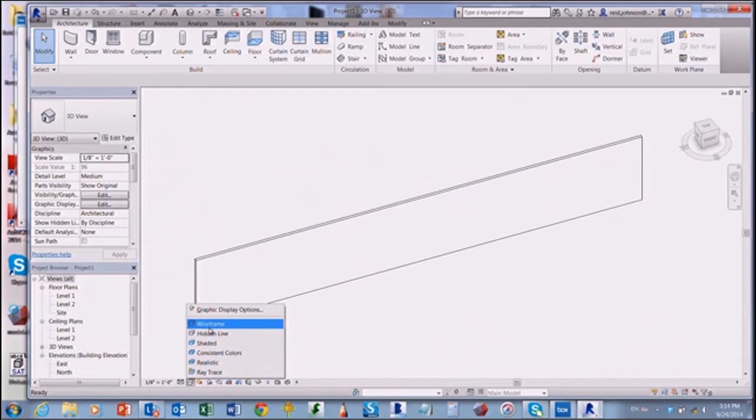Start off, and I'm going to go to the, after making that wall, I'll go to the 3D view and look at it. I like to turn on the shaded view down at the bottom left when I'm in 3D just to see a little more clearly what I'm looking at.

So basic wall. A lot of the trouble of making families students have is getting off the ground, literally, because everything in default, everything in Revit, the default is on the ground on one of the levels, so the horizontal planes. So it's important to get up and off of the ground in architecture.

So we're going to put some families on a wall. So we're going to go to the R, and we're going to hover over New, and pick Family. So R, New Family.

And we're going to do a generic family. I like generic families, they're a good place to start. You can do a lot with them. If you master the generic families, then you can pretty much do most of the others, except for the mechanical and electrical families - those take a little extra. So it's a good place to start.

We're going to do just a regular old generic model. So right here, generic model, and say open.

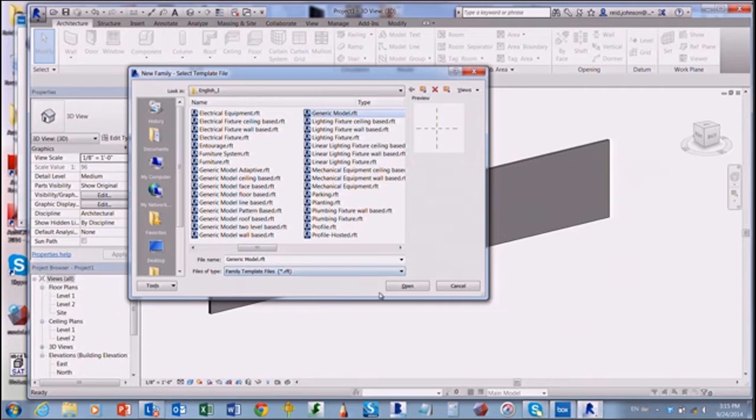So here I am, I'm looking down at the ground. You can see I'm at the reference level. So basically at the ground plane, I'm making a family, and I'm staring at the ground.

And all my tools to make families are up across the top. I've got extrusions and sweeps and revolves. Let's go ahead and make an extrusion, which is probably the easiest shape to make.

And you've got all the tools here, splines and lines and whatever type of shape you'd like. We'll just do lines for now, that's fine.

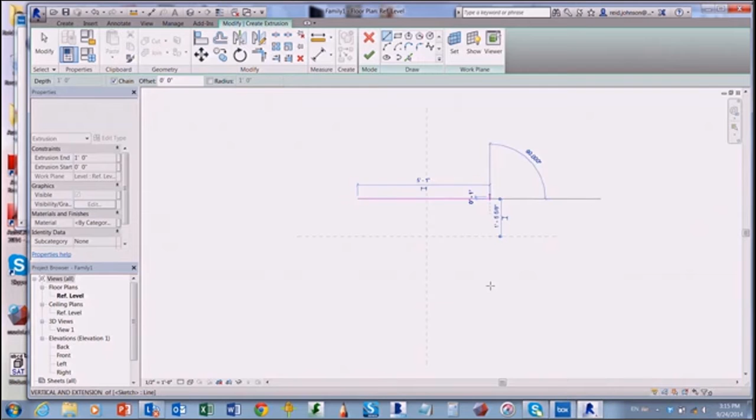So draw a basic shape, maybe a box with the corner bitten off of it. Trick is to make sure everything closes up nicely.

When you're done, hit finish. So there's my little shape I've made. Assume this is a wall panel I want to place in Revit.

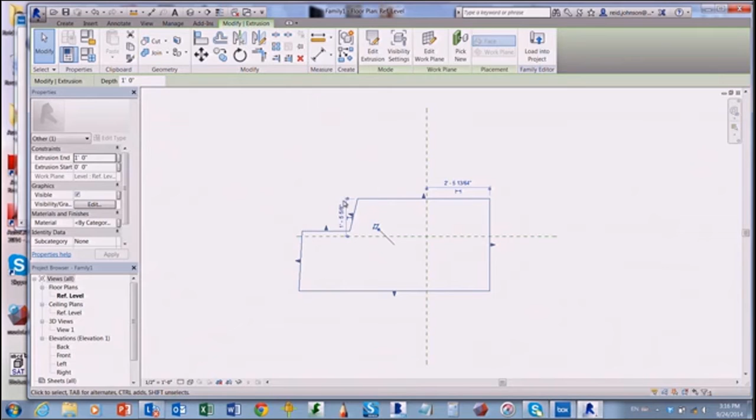Then I can come back, once I've created that shape, two things. Before I load this back into the project, I always want to save. So I go blue R, and I hit save.

Otherwise it's called Family 1. And I've looked at students' models, and I have Family 1, Family 2, Family 3, Family 4, Family 5. I'm like, no wonder you stay up all night in studio - you can't tell what anything is.

So be nice to your tired self and name everything so that later on you know what everything is. Just give that a name, we'll call it wall panel. So there it is, I've given it a name.

Now if I were to load this into the project, you can see it's on the reference level. So where's it going to put it in the Revit project? On the floor. But that's not where I want it necessarily, I want it up on the wall.

So if you go over here, to the top left, there's a little button with a yellow folder next to it. If you click on that, there's a couple little check boxes. It's always the little check boxes that get you - if you weren't sure why it's not doing what you want it to do, there's a little mischievous checkbox somewhere that's messing you up.

So the ones I want to check are two. The first one is work plane based. That means the default is at their reference level, their level or floor plan based. I want to make it work plane based - that means I can place it on any work plane, it doesn't have to be a floor. So that's pretty helpful to go vertical.

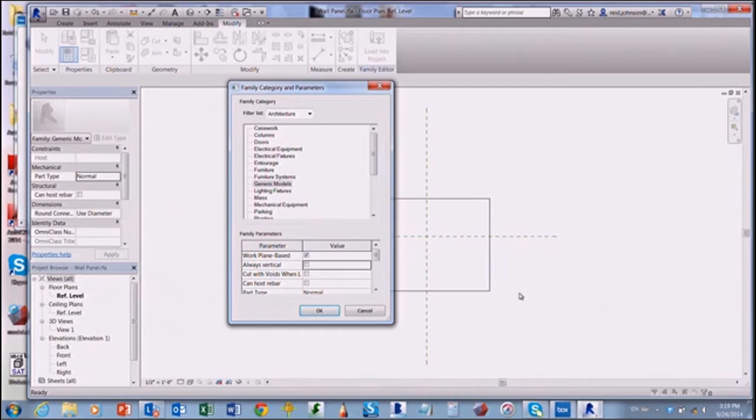The other one sometimes is cut with voids. If you want the family to be cut, like when there's a door there, that's an important one too. But for now, just check work plane based and uncheck always vertical.

And now we can load this into our project. By default, it's going to take us to a level 1 floor plan view. Go back to your 3D view.

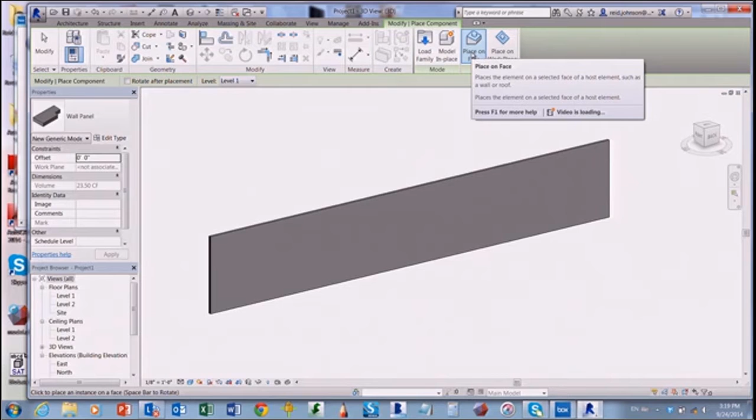And now you'll notice, assuming that place on face is checked, you can now place this family on the wall anywhere you want to, or on any other object. Basically, you're placing it on the face of another object. So those little checkboxes are little bugaboos - it's hard to know they're there, but once you know they're there, you can put this on anything. So I could place this on a wall, on a door, anywhere I want it on a vertical surface.

Is everybody able to do this? Anybody not able to do that? What's the difference? I've seen there's like a generic face-based family - is that essentially the same thing?

It's similar, we'll look at those in a second. I've basically taken a generic family and made it a face-based family by doing those checkboxes. So it's good to know they're there.

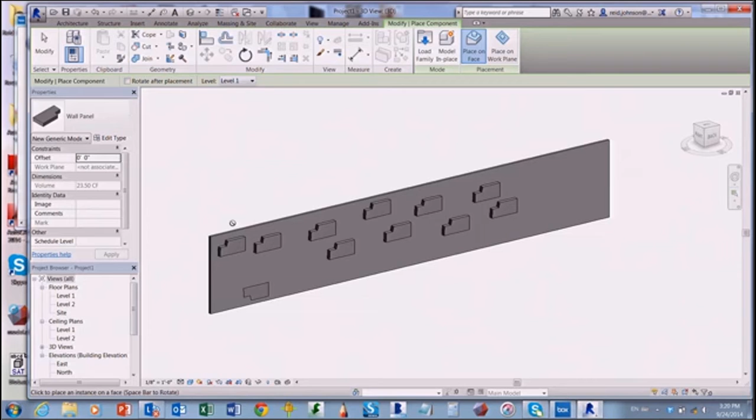And just as a trial, you can watch, or you can do this yourself if you'd like - you can make a wall. And if I do a curved wall, I can then place a component. It will also place that on a curved face as well.

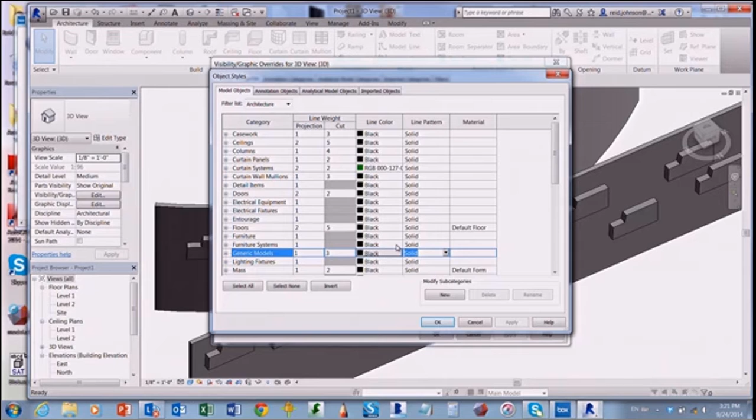This is kind of dark with that projector, so let me put some white outlines to make it a little bit easier to see.

So it'll find a tangential face to locate that. You can put it on flat objects, on curved objects. It can be really helpful for placing families. So it won't curve with the object, but it'll be tangent to the wall.

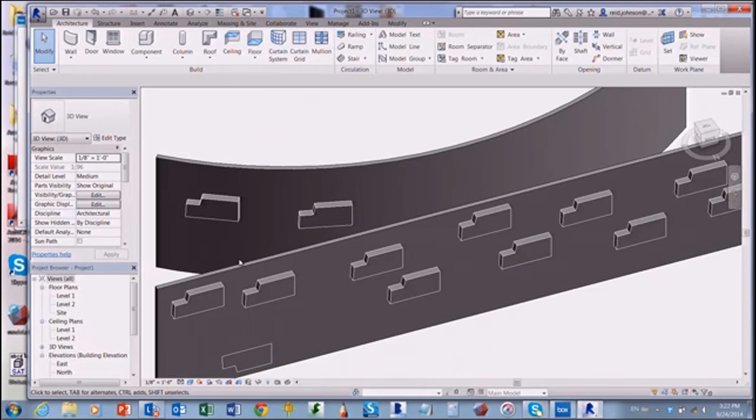A lot of these basic functions in Revit are designed that way on purpose. If you're doing a curved wall in reality, there are certain materials that can curve, like concrete or plaster. If you're doing almost anything else to build a curved wall, it's going to be built of a series of flat panels - that's why Revit does that, because it's kind of an architecture move to be built of a series of flat panels.

All right, so if we go back into this family, just two more quick things on this generic family. You can say edit family, or you can double click on it - takes you back. A couple of quick ways to add parameters, I'll show you my favorite ways. Let's go look back in the family - we can look at the front view of this.

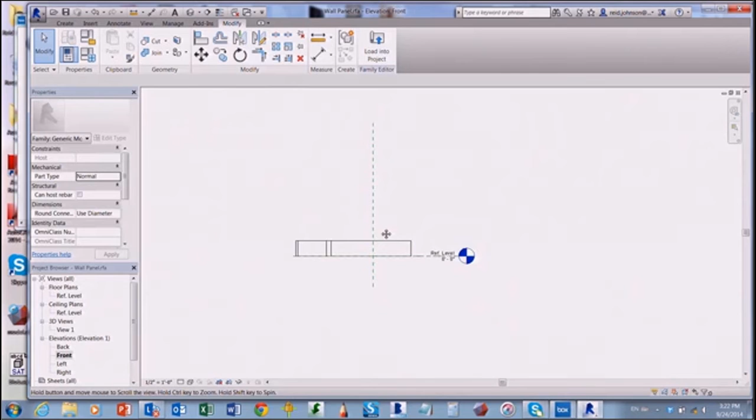It's good to add parameters, and the most common parameter we add is to change its dimensions, change its size - it may not want to be the same size all the time. So here in the family, I can come back and add a dimension, DI for dimension, or it's right here in the modify tab, add a dimension. So from the reference plane to the top of your family, your object, you can put a dimension here.

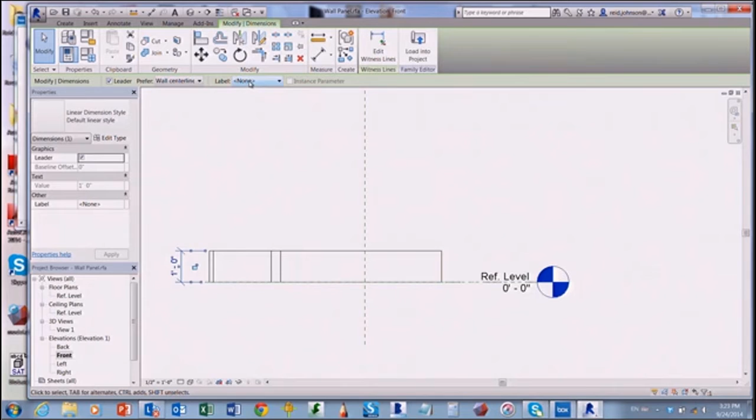Then I can select that dimension. And right here where it says label, I can add a parameter. So label, add parameter. And I can then give that dimension a parameter, which is really important. So I can call this simply the height.

H-E-I-G-H-T. And can anybody describe what the difference is between type and instance parameters? Type parameters will change the entire family. Instance parameter will change the individual one. Yeah, that's a good explanation.

So I like to give the example of a door. Doors in a project, you might have 3 or 4 different door widths, a 3-foot-0 door, a 2'8" door, a 4-foot door, and so on. But in the building, there'll be 30 3-foot doors, 4 4-foot doors, and 20 2'8" doors. That would be a type parameter. You want a bunch of the same type.

But if you want, heaven forbid, all the doors to be different, you want a 3'1" door, a 3'1 1/2" wide door, a 4'1" door, you're going to raise the cost on your project like crazy. Maybe there's a compelling reason to do that. That would be an instance parameter. If they all want to be unique, that would be an instance parameter.

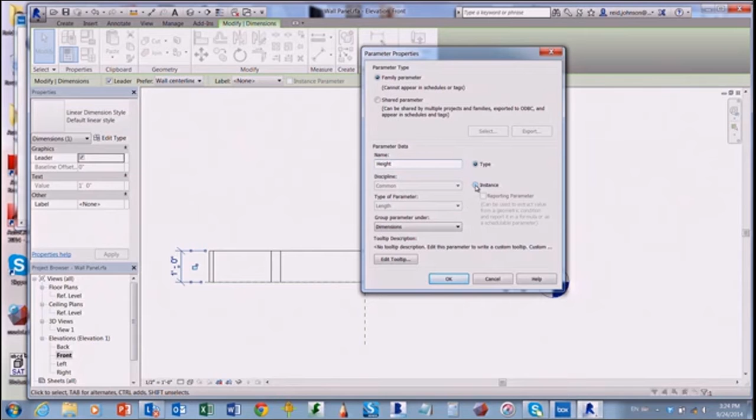So let's do an instance parameter for this one. Height, instance, and say OK. And now it's always important to test your parameters before you load it to the project to make sure it works. I do that in the upper left under family types.

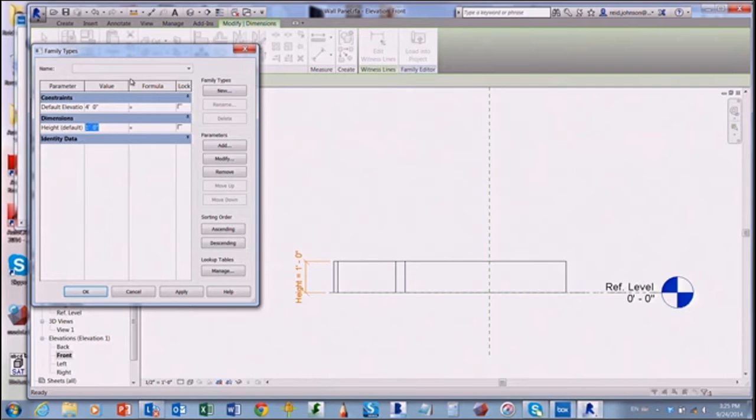There are 4 little blue squares. I click on that. And then from here, you can see that my dimension, my height dimension, is shown up as a parameter, and I can change that. I move this window - sometimes it wants to be right on top of the object, so I move it off to the side. And I can change that height and say apply.

And I can watch the thing grow or shrink depending on the dimensions I put in here. If there's a failure, which happens a lot when you're in testing mode, it will say sketch is over constrained or can't resolve constraints. And to debug that...

The trick I find is to dimension something else. So what about this could I dimension? Maybe I could put a reference plane at the top. So let me just demonstrate that. I could do a reference plane or a reference line. Let's do reference plane.

And instead of dimensioning the box, I could dimension the line. So let me delete this here. I'll do a dimension now to the reference plane. And I'll give that the height parameter.

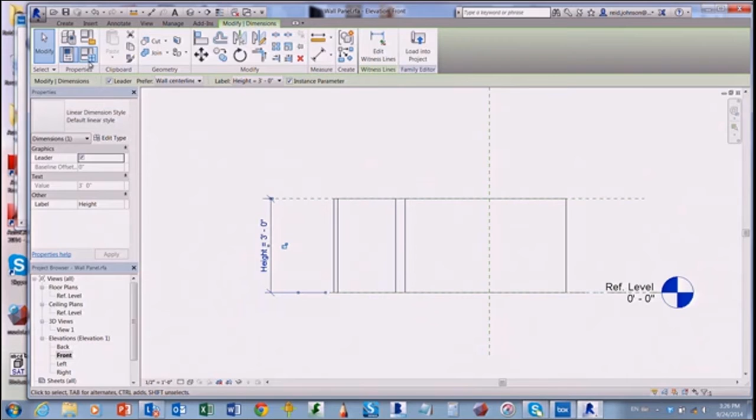And I can test this to make sure that's working. So I'll change that, make it taller, 4, and say apply. Now I can say I'm controlling the reference plane successfully, and that's working.

Now all I have to do is align, so AL for align, or it's up here, the align tool. I click the reference plane as a target, then I click the top of my box. It's going to shoot it up to there. There's a little lock that appears. I can lock that, and now they're stuck together like glue.

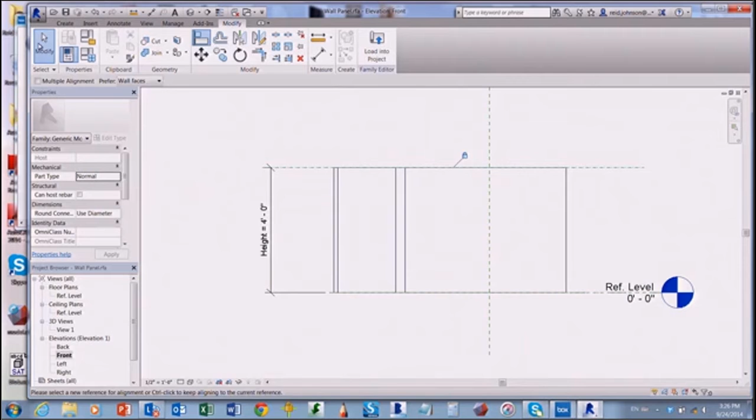So if I come in here, I can change my height, apply, and watch it grow and shrink. So that's the trick to debugging those. They come in, they don't work - try to dimension something else. Try to get it to work at the lowest form with these reference lines.

So if I create something called reference lines, see if you can get these green reference lines to move where you want them to first, and then align your shape to those green reference lines. So there's a couple of tricks. I know that those come in, they don't always do what you want them to do. That's a way of debugging.

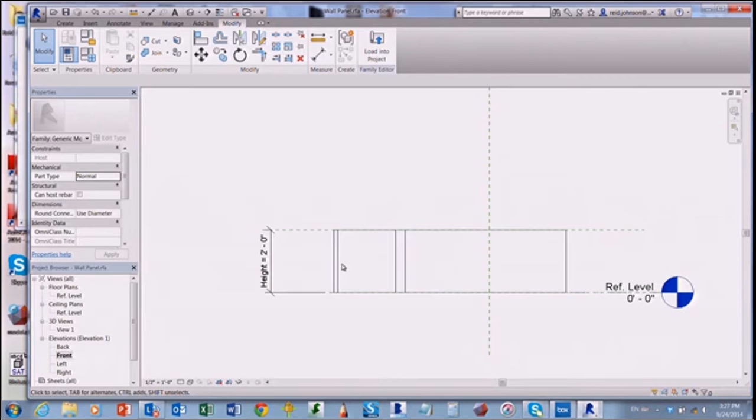So another parameter that's really critical in architecture is material. We always assign material to our building designs. So if I click on the object, you can see over here under materials and finishes, I have a material. Right now it says by category. There's a little button - it tells you you have no idea what that is, but that's a parameter button.

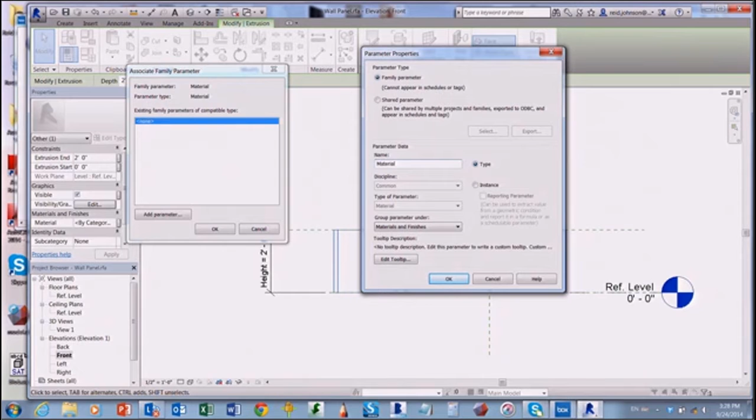So if I click on that, I can add a parameter. I can call this one material. I'll make it an instance parameter as well. And I'll say OK here and OK here. And now I'm good to go.

I've got two parameters, height and material. If I load this back into my project, I can say overwrite the existing version, and you can see they all change. Now I can click on these individually, and you can see I can adjust the material and the height of these individually. So I can change the materials, I can change the height of all of these individually.

That's a basic example, but knowing how to do that is super powerful. You can put in objects, you can change them, alter them, and a lot of things we do in architecture have multiples, so you can affect that across the whole project.

All right, so let's do one more generic family, maybe one or two more, and then we'll move on to another topic.

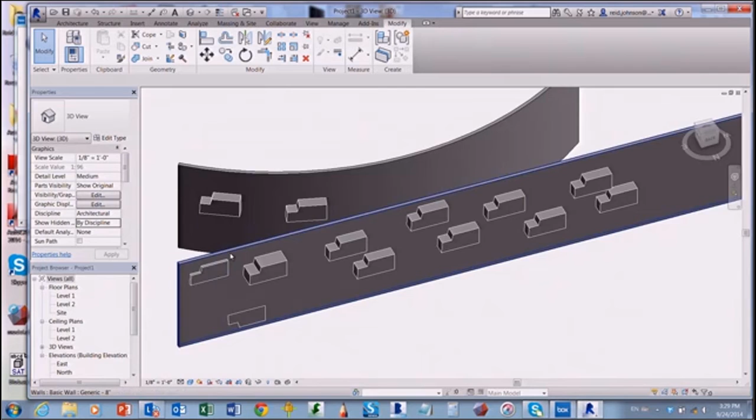So if you guys go to the purple R, and you get new family again, in generic model, you guys mentioned the face-based, so that's a family that's going to stick on faces automatically, so you guys know what that does now.

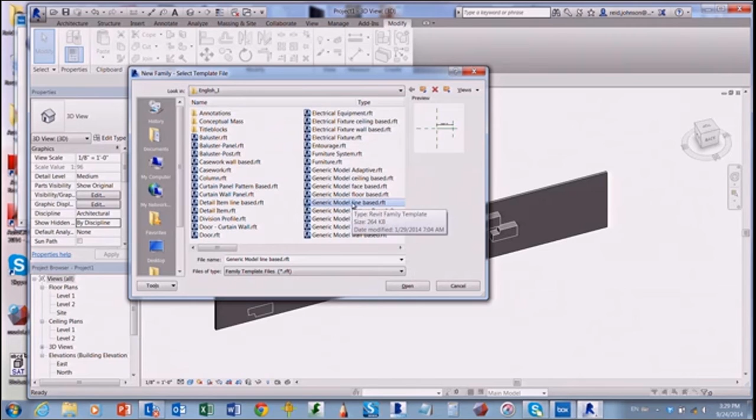We're going to do a line-based. So generic model line-based. And a little bit later we'll look at generic model pattern-based, which can be pretty cool. Just know that's one of the generic models. So generic model line-based, we'll say open on this.

So this is pretty cool. You can see there's a little line here. And there's a start working plane and an end working plane, and there's already a length parameter built in. So whatever I draw this line in Revit, it will drag across whatever shape I have from point A to point B.

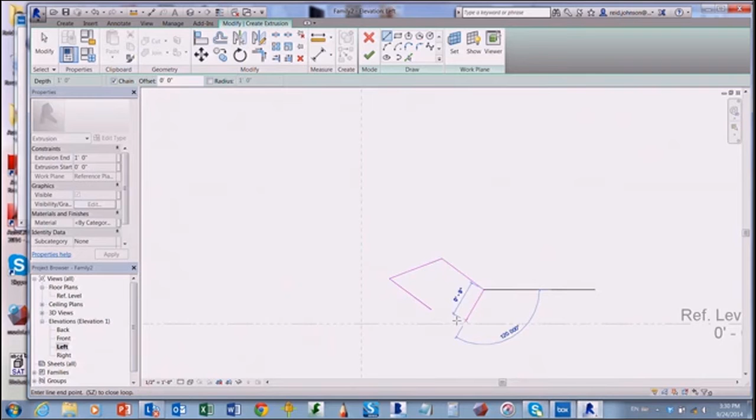So let's come to my left view over here, left view. And I can come again, do the simplest one, which is called an extrusion. Then I can draw some sort of shape. And finish that shape off.

And go back to my reference level. You can see my shape, it's right here. And if I click on it, there are little blue triangles. You can drag it so it's right in the middle.

Right now there's no association between this shape and the line-based family. So I have to use the alignment tool, which is up here, align.

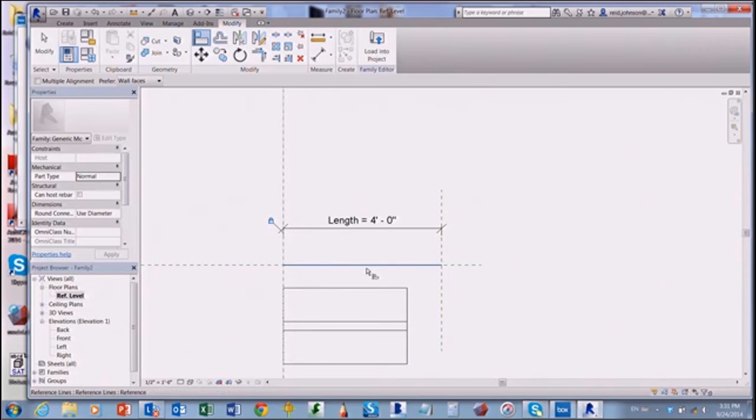I'll pick the back, the starting point reference plane, and then click the back of my object. A little blue lock appears, I lock that. Then I do the same thing for the front. I click the front reference plane, the front of that object, and I click the lock, and that locks it to the front. And now I can test it.

If I come back and change my family types, and I change the length to whatever I want to, say apply, I will watch that shape grow with that line.

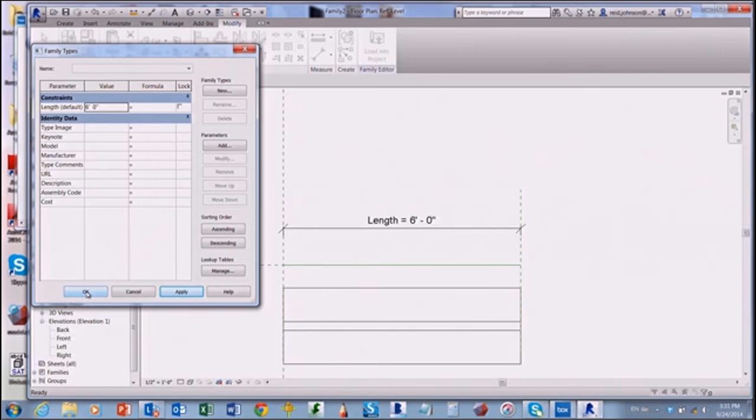So go ahead and say okay if that's working. Anybody need help getting that to work? You guys got it?

Okay, then we always save it. So blue R, save, give it a name. Calling mine line-based family. Then I hit save.

Now I load this into my project. And you can see I can load it into another family or to the project. Which one do I want to load it to? The project, most of the time.

You can also do nested families, which is families inside of families, so you can get pretty complex with your family editing. So if I have a door family, and I want the handle to be a separate family and have its own function, I can take a door handle and load it to the door family, and then load it to the project. So families can have multiple families inside of a family.

That's not confusing, all right. Yes? If you were to, in that instance, if we were to look at the handle to the door, would you save that sort of, the parameters of that family on the door, and then just load the door, and then the handle would be?

That's where it gets tricky. You have parameters for the handle, then you load it into the door, and you have to link the parameters. So it kind of packages them? Yeah, so when you finally load to the project, you can control the door parameters and the handle parameters in the project. Those get a little bit confusing, but you'll find when you're working as a professional, you just have to do those nested families sometimes. Especially doors and certain wall components and things, you'll find yourself using those.

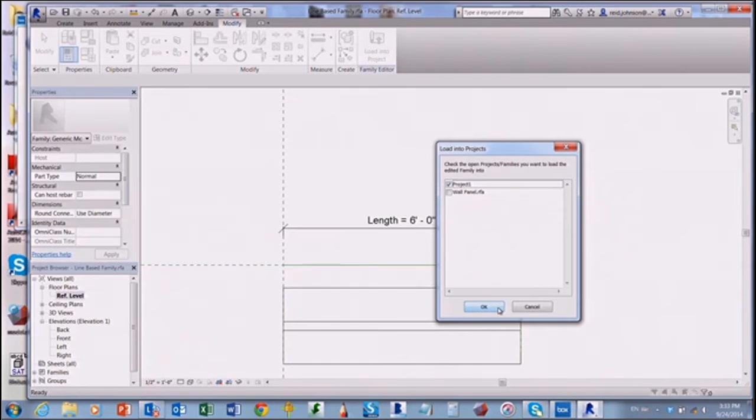So it's line-based, you can see Placed on Face is checked. If I go to my 3D view and hover over one of these walls, I can now draw a line on the wall to place that family. Every time I draw a line, I'm placing that family on a wall.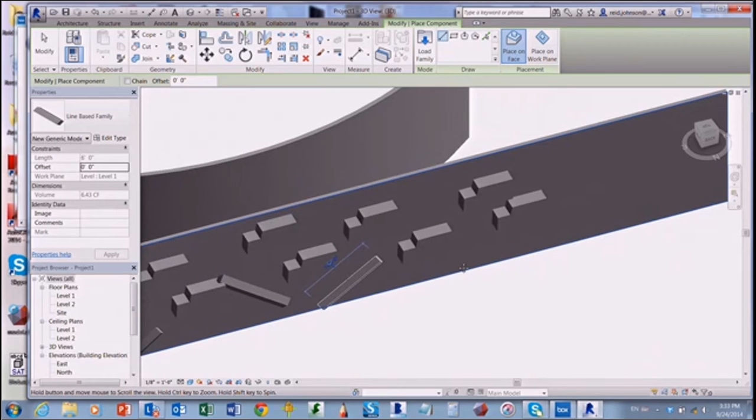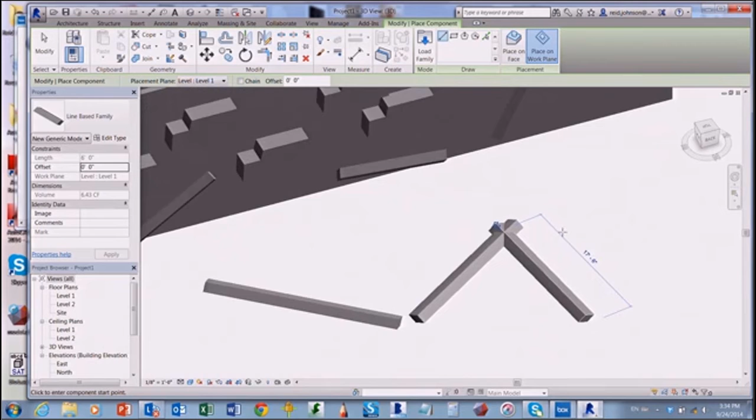It works best for straight things. It's not going to let you do this kind on a curve. If you want to draw on the ground, you click on Place on Work Plane instead, and now you can draw this thing on the ground. So that's a line-based family. Anything that wants to be linear, you can just extrude that shape as long as you want in a line-based family, and those can be pretty helpful as well.

The cool part with all these families, if you want to make a design change, you go back, edit the family, and every instance of the family, the entire project gets updated. So that's the power of that.

If you look back in history at where this technology's come from, the Renaissance is when drawings were invented - plans, sections, orthographic projections. Think Renaissance, that's when that stuff came about. It's hard to believe that's a technology because we take it for granted. Everything has drawings, we build a building, there's drawings. And it came about in the Renaissance.

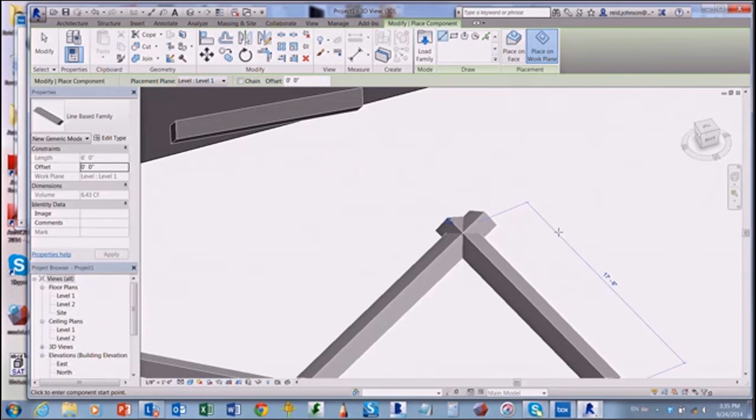Moving forward to 1983, we have AutoCAD for the PC. Now people could still draw that Renaissance technology, but using a digital pen. The huge benefit there was not having to erase - you could copy and paste instead of drawing something over. Now with building information modeling, you can make a change to one element and it will update an entire project in 3 dimensions and all of your drawings, which is really powerful. That's why this has been adopted so heavily, because of that power.

All right, so that's generic modeling. Now let's look at a couple of tricks for doing that, making parameters.

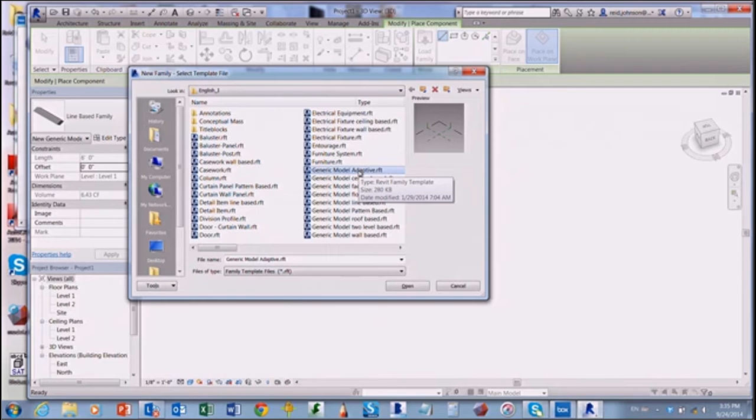Let's go ahead and do a new family again. So the blue R, new family. And let's do Generic Model Adaptive. So new family, generic model adaptive, and we'll say open here.

Let me see if changing the brightness on my laptop helps. Let me just try that. Nope. Don't see brightness on here. If you guys can't see, let me know, and I'll see if I can do something to increase the contrast a little bit in Revit.

You can see adaptive families are on this gray background, so they're a little bit different. All the others are on a white background in Revit, this is gray. So now I'm in crazy land - helps you know I'm in a different environment. Here it is, you can see the basic environment has 2 vertical work planes, this one and this one. And it has a horizontal work plane, the ground plane, represented by the black dash that's the center line. So ground plane, vertical plane, and you can make more planes.

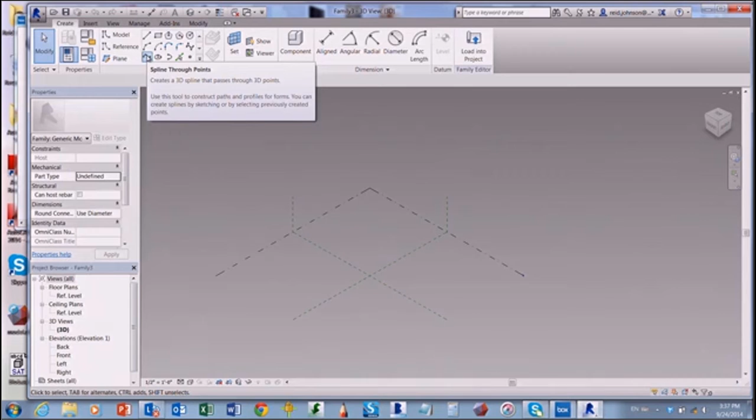This works a little bit differently. If I come over - remember, your traditional families have a bunch of modeling tools up on the upper left - this one has no modeling tools. So it's very different, I need to come back and start by drawing lines. So you guys can pick a spline first. And you can see by default it's going to start drawing on the ground plane, which is what we want. So make a spline with about 4 or 5 points, and when you're done, hit escape.

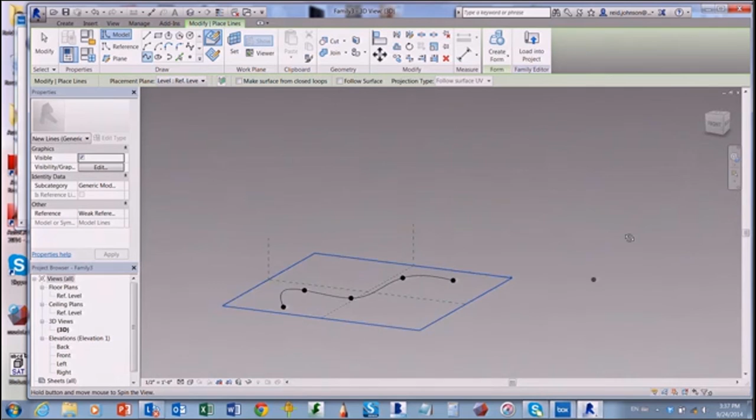So now I've got a spline on the ground. It's good to press shift and hold your mouse wheel down to make sure it really is on the ground - that's pretty important, it can be a little confusing as to where you are sometimes. So you hit escape a couple times to get your white selection arrow, and then click that line you've drawn. In adaptive families, it's a little bit different to create forms.

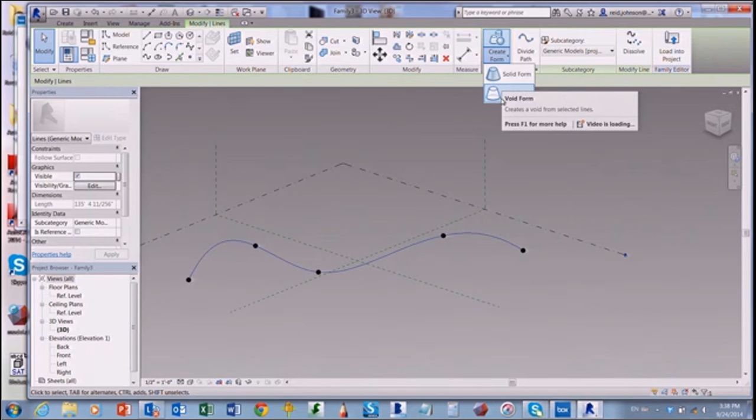Here you come up to the top right and say Create Form. You can do solid form or void - voids are negative, solids positive. If you click that button, Revit attempts to make a shape from whatever you've drawn. So we do that spline, and then there is the shape.

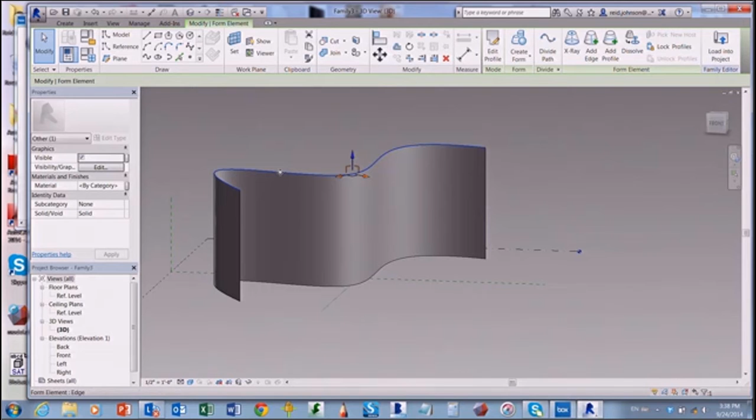I'll turn on my shaded view to see it a little bit better. So there's my shape. Now from here I can edit this. I can click on either the points or the lines, and every time I click on something I get a little UCS, as it's called in CAD, but really it's a direction XYZ axis. I can drag this around and start to modify my shape.

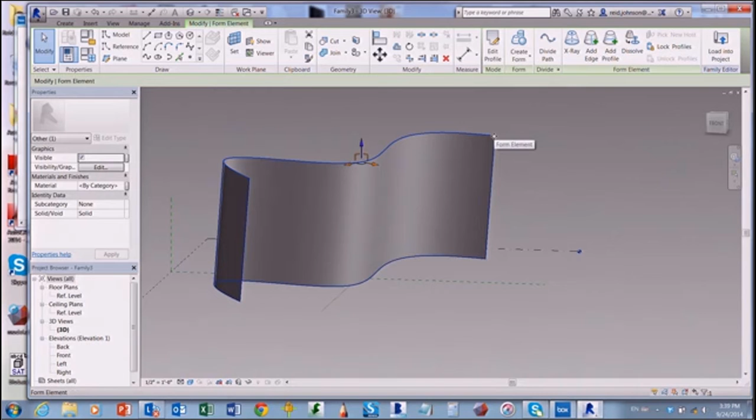If I click the arrows, I move in one axis. If I click the little boxes, I move constrained to 2 axes at the same time. So I can move the lines. I can also hover over the edges and find the points. If I have a hard time finding those, I can hover where they are and hit tab. Eventually we'll find the little blue points, and I can modify and move just one point at a time.

And I can start to create really complex shapes this way. Is everyone able to do that? Anybody need help getting there?

Is there a way to show your points on the model? There is, and I think the shortcut is to double click it, and that can be a little challenging. Or if you can highlight the model, there's something called X-ray mode. If you click that, you can actually see all the points on the model. So X-ray versus regular mode, that's a good point.

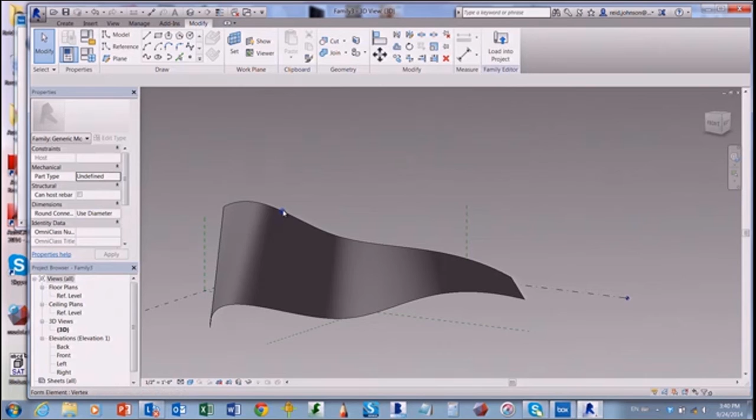These can be a little bit tough to select. If you have a hard time selecting it, just hover on one of the edges and hit tab on your keyboard till the whole thing selects, and then you can get to that X-ray mode.

And in X-ray mode, you can see there's more you can do. You can add edges, you can add profiles, dissolve. There are more functions you can do, and we'll play with a couple other things you can do. So really good question - yeah, X-ray mode. All right, anybody else? Let's go to the next thing.

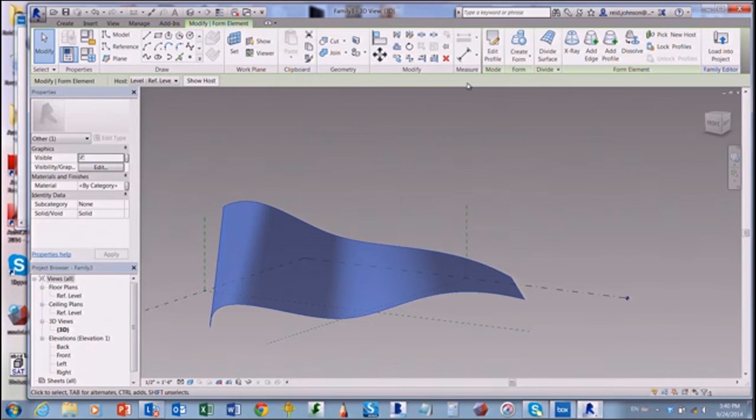So that's taking, again, Revit - the default's always on the ground, so I drew on the ground and go up. Let's take this thing off of the ground. So select your object, hit delete. That's going to take your object out.

So now I can see my vertical work plane. Work planes in Revit are really powerful, but they're not intuitive because you don't see them - they don't select automatically. You have to select them and you have to understand them. So if you want to increase your Revit skills, one of the best things you can do is watch YouTube videos on work plane editing and controlling those work planes, because they really affect what you do.

So I'm going to click on one of these work planes. If I click the little show button up under modify - it's also under create - it's called show work plane. That will show the active work plane, and I can select it like I did. If it doesn't select for you, you can click set work plane and click it. That'll make it the active work plane.

So you can see you can choose either of the vertical planes, and if show is turned on, you'll see it. I can set it, make it the ground plane again. But right now I want the vertical plane right in the middle. So now I can draw a shape on the vertical plane.

So you follow the same process. We'll do a spline of maybe 4 or 5 points. Hit escape a couple times to finish that up. And there it is - you can click on that spline, and you can click on the create form. I can create a solid out of that.

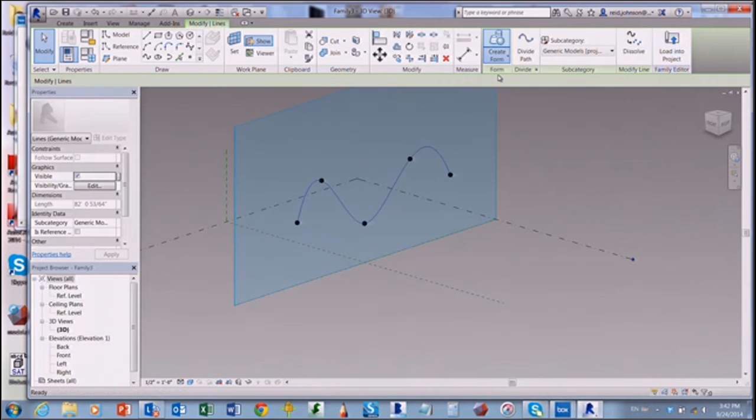I can grab the edge, I can pull it out to make it a little bit bigger. And there's my shape. I can come back, find the points, and I can edit that as much as I'd like.

So once you've got a form, does anybody need help getting that? We're going to start to alter this form a little bit. Is it good?

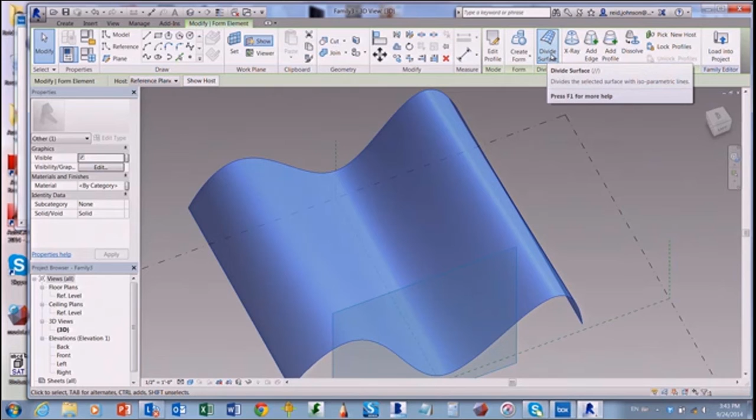From here you can add what's called a pattern. To do that, you need to select your surface. So I hover over the edge and I hit tab to select the whole thing - I know I've got it when it turns blue. Then up at the top there's a button called Divide Surface, so I click on that Divide Surface.

And you can see right away it turns it into a bit of a lattice shape. Over here on the left, the default is no pattern. But if I click the word 'no pattern,' I can pull this down and find all sorts of patterns.

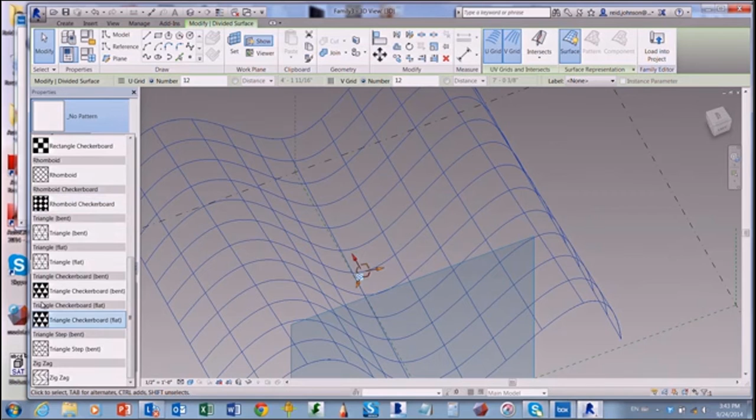The ones that are black and white are part solid, part void. So go ahead and pick a pattern. I'm just going to pick a part solid, part void triangle, and that's going to apply a pattern to that surface.

As you notice, there are all sorts of patterns you can pick from to help with your design. But the cool part is you can edit your pattern from there. Over on the left, you can choose the number, so I can increase it. It's 12 across, that's going to densify the pattern. Change the number, hit apply. I can make it less.

And make it smaller. I can change the justification. I can do a fixed number, or I can do a maximum spacing. You can rotate the whole thing too, changing the rotation angle. I'll put mine on a 45. Hit apply, and I can start to really adjust this pattern to what my design is.

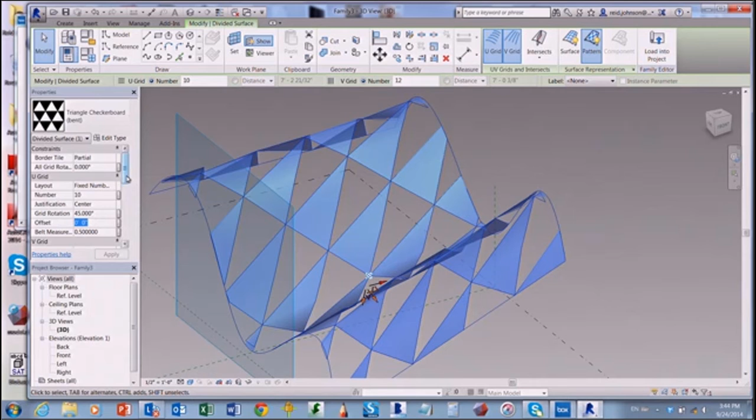I can offset the pattern from the surface if I want to. That's an option as well. And quite a few options in here.

The one thing to look at is you've got a U grid and a V grid, up here labeled U and V. If you think back to geometry class in high school, you plotted things out in the Cartesian coordinate system, X, Y, and Z, on that double-lined paper with little squares. Bring back nightmares or happy memories? That's X, Y, Z, and most things in Revit are X, Y, Z.

When you start to make a really complex form like this, heaven help you to find the X, Y, Z location of these things. So they call it U and V instead. The V is easier to remember, that's the vertical lines, and U is the horizontal lines. So they scrap the X, Y, Z and go with U and V.

And if you get into really sophisticated rendering, like using 3D Studio Max, you'll see U and V there again. Because in 3D Studio Max, you can render people's faces, characters, or complex architectural forms. When you unwrap something to put on textures, it's UV mapping. They go one step further in 3ds Max, it's UVW, and W is kind of the third dimension. So, U and V mapping.

The other thing I find interesting to change, in U and V, at the very top is the border tile constraints. You can see mine is set to partial, meaning it's going to cut my pattern at the edge of my shape. But I can change this to 'empty,' which means it will only build the pattern where it can be whole shapes.

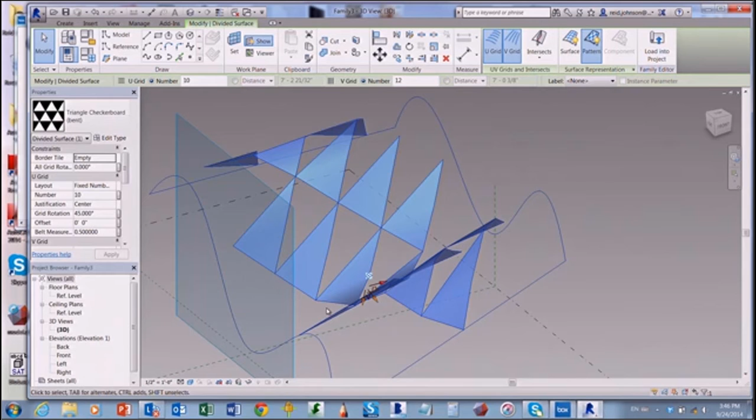That can be very helpful in your architecture. If it's just whole building panels you're dealing with and you want only whole building panels, you can do that. Or conversely, you can do overhanging, where you define the boundaries, but at the ends, the panels might overhang. Think of the architectural applications: cutting it off so the building cuts off at the edge of the pattern, or the pattern is more important than the building profile, so it overhangs the top and side, or conversely the pattern can sit within.

So lots of patterns here, so many options, so many parameters. You can really model about any pattern you can imagine, through a combination of picking a base pattern and then editing it from there to create that.

Can you add a thickness to this pattern besides doing it in a custom pattern-based family? That's where you do it. The only thing you can really do right here is an offset, raising it off the grid a certain amount, but it still has a thickness of zero. Okay, we talked about that, mentioned it just a little bit.

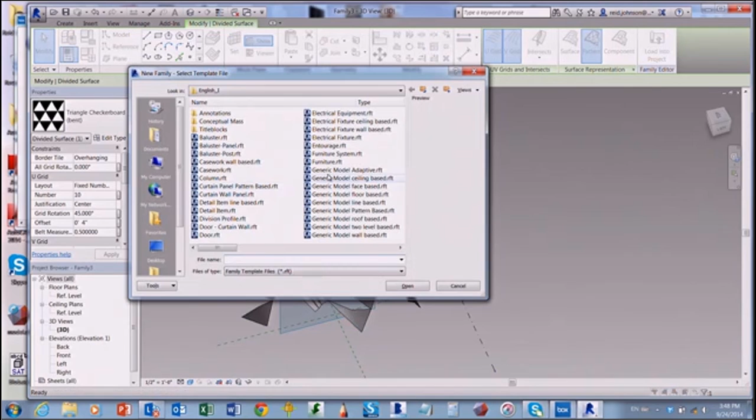You'd come in and do File, New Family, and choose a generic model, pattern-based. And that's where you do it. You can see these pattern-based families have 4 points, and when you put the two things together, you can load this into the other family and create some thickness, create some panels. Again, that's a nested family, a family inside of a family.

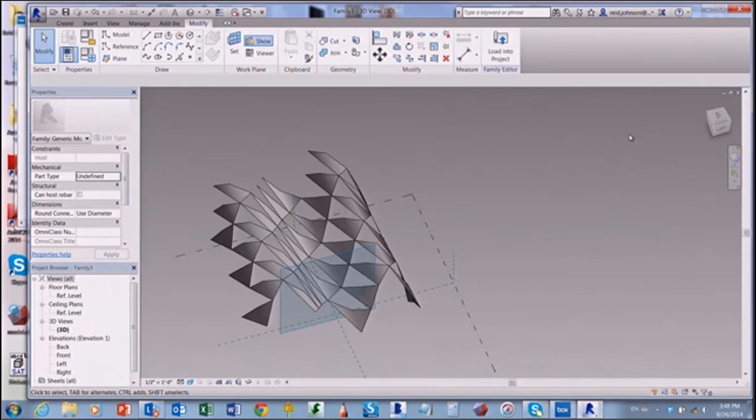All right, so here's where we create. Let's go ahead and delete this.

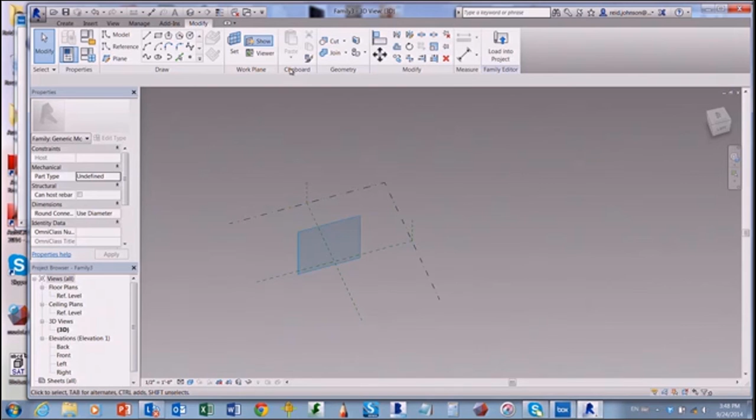If you have any previous shapes, delete those. So we're back to basics. Now we want to set our work plane to the ground again. I click on the Set button, click the ground plane. Or you can double click the ground plane, it's going to set it also. So now I know I'm drawing on the ground.

It's a little hard to see, but there is a vertical plane right here and one going the other way. It comes with these defaults too, but I want more planes so I can draw more shapes. So I'll come back and say plane, either from modify or create, it's in the same place. Little button called plane, it's going to make a reference plane.

I want to draw a second reference plane parallel to but in front of the existing plane. So out here I'll draw a second plane. And I need to make sure that my active plane needs to be the ground plane.

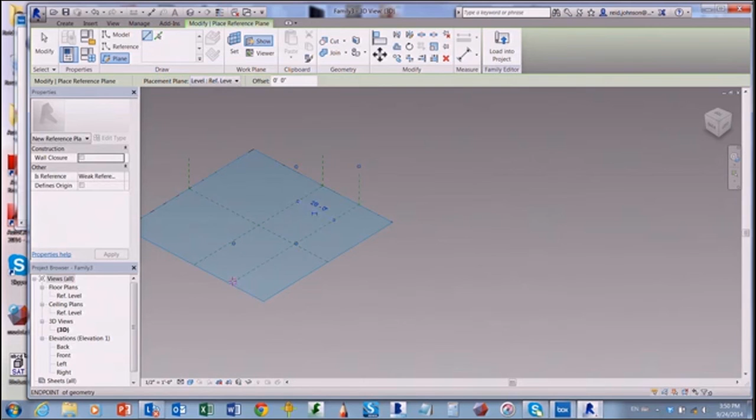And you'll notice it gives you little degrees. If it's 90 degrees, then I know it's parallel to the other plane. So I've got 2 planes. And now you can see I can set those as my current plane. So here's the one in front, and here's the one in back.

When you have trouble making those, the trick is making your active plane the ground plane so you can draw more than one.

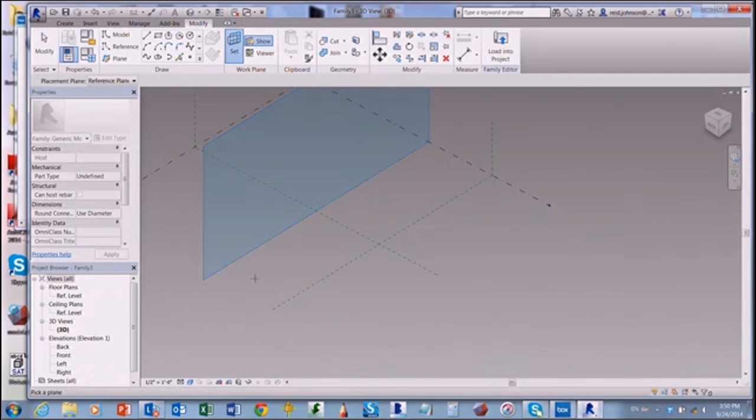All right, so you want to highlight as you set your active plane to this back plane. Leave the front one alone for now. And on this, I'll use my spline tool again. I'll create a spline with just 3 points, and then hit escape. Then make one right below that with 3 points.

So 2 rainbows, if you will. Or 2 frowny faces, if you'd rather. And then use our regular line tool to connect it, so it's a continuous closed shape. So use a regular line tool to do that.

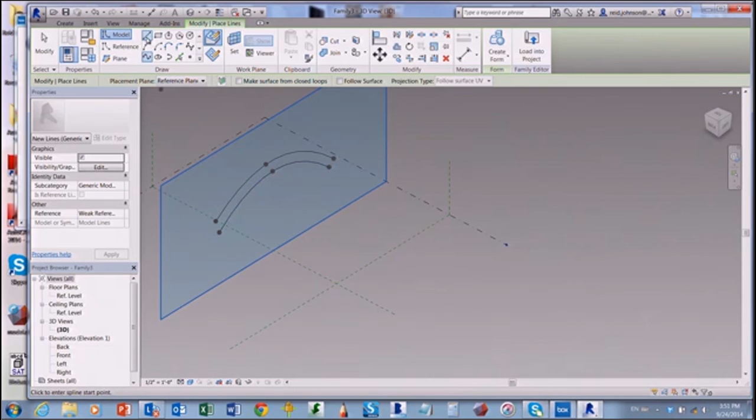It's important here to zoom in and make sure it snaps. You get little pink or purple endpoint snaps to let you know you're clicking on the little points. Make sure you've got that, or this won't work. Hit escape, and I'll draw another line here, from this point over to this point. Hit escape, and that's going to close that shape.

So there's my frowny face. Now I want to draw the opposite on the other work plane. So I'm going to go back and say set work plane, and I'll pick the work plane in front. And now I'll draw the smiley face again with 3 points.

It's not critical but important to have the same number of points. This will work a little bit better. And click my spline here. Spline, 3 points. Now I'm happy, it's a happy face. Three points here.

Now I click the line tool to connect each end. So from here to here, I'll hit escape. And from here to here, cool.

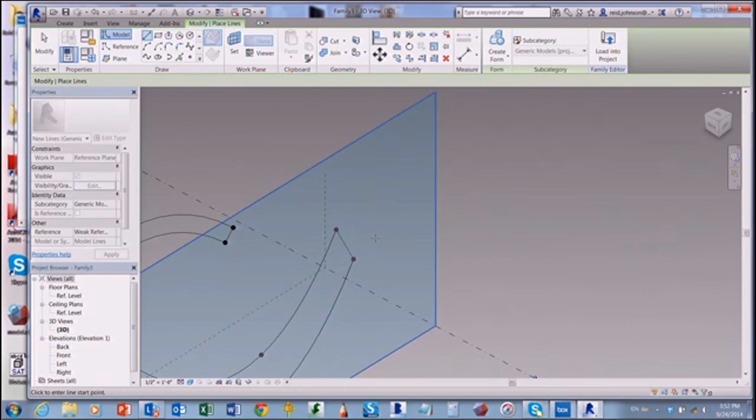Now you've got the frowny and the smiley. You can zoom around to make sure you've got them on separate planes and looking good. Once you've got that, you can click escape or click your modify button and select all of the lines. You can do that by clicking a line, holding control, and grabbing all 8 lines. Or you can attempt to do a crossing window, but make sure you grab all of them.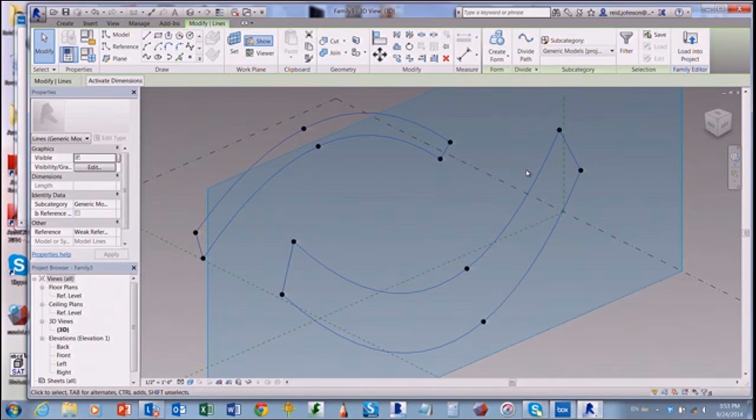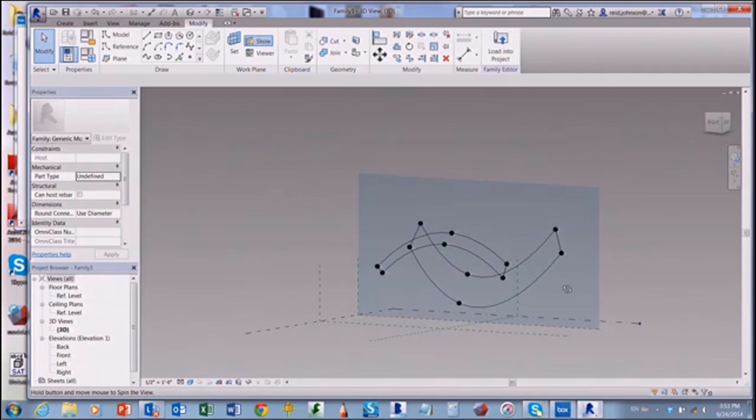Once you've got that, you can say create form. Mine didn't do it, which means I wasn't careful. Make sure I have everything. If it doesn't create form, you want to make sure you snap. I'm not being super careful here. I'll try again and be a little more careful.

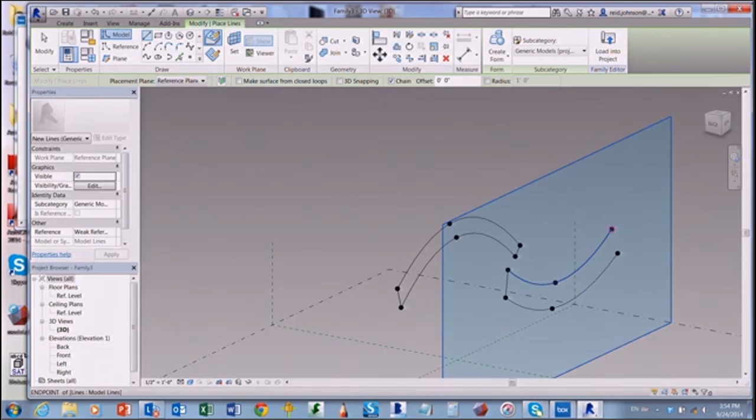This is my first one. Whose is working? Am I the only one? So I've messed up here.

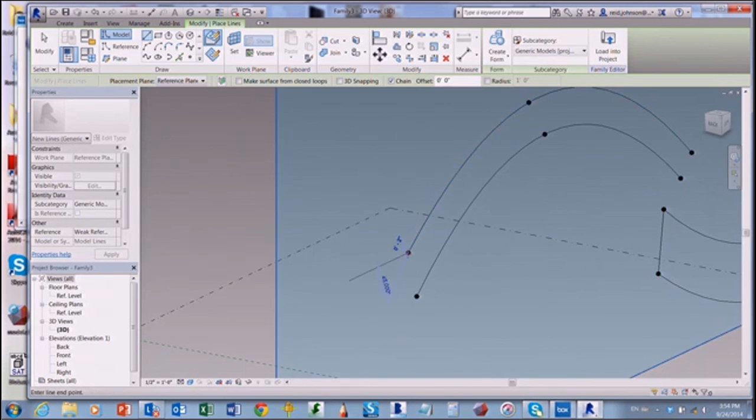You can use Revit a long time and it can still give you grief. Now late at night when it's giving you grief, you've met somebody from Autodesk, you can say, darn that Reid Johnson, ruining my life.

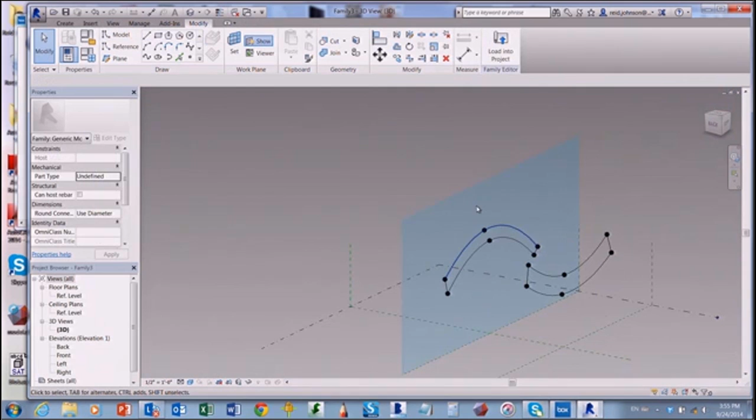Alright, let's see if that does it. There we go. As I get older, my eyes get worse, and it's harder and harder to see those little snaps to make sure I actually close everything up. So now I've got this surface, and you can see if I click on one of the faces, I might have to hover over the edge and hit tab to get just the face. You can see I can push and pull on that face, and it will make the whole thing stretch. Don't get any crazier than that, or the next step won't work.

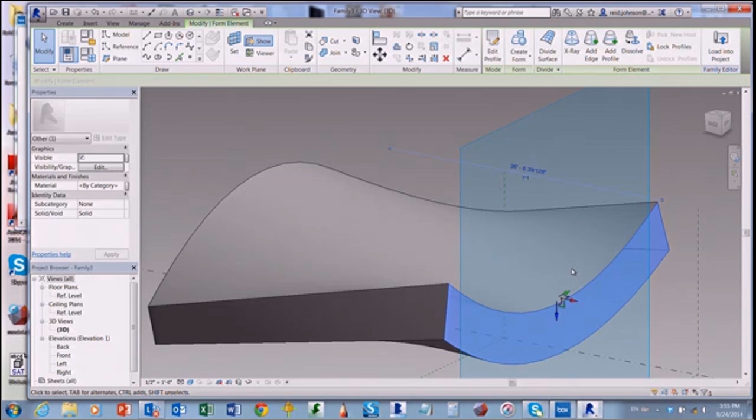So we're going to go ahead and dimension this thing and add parameters. Just like a generic family can have parameters, a basic family, one of these adaptive families can have parameters as well. So I'm going to set my work plane down to the ground again. That's important. I want my dimensions to be on the ground, but they're dimensioning, referencing the shape I've made up above.

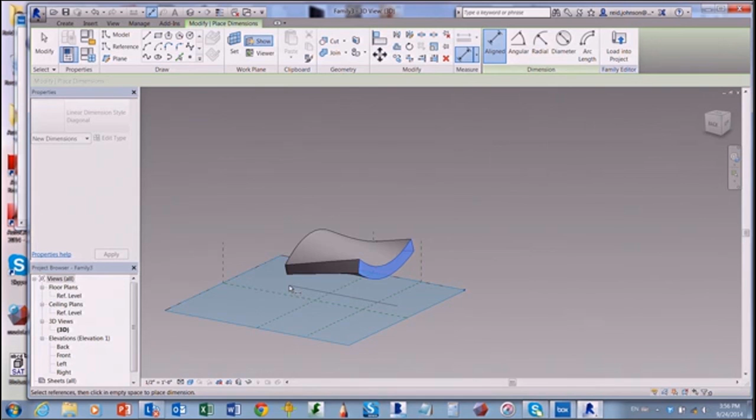And I'll add a dimension, and I'll click one face. You can see it highlights the entire face in blue. Then I need to orbit around. I hold shift on my keyboard, press the scroll wheel down to orbit over, and I'll grab the left face, and then I click off to the side to finish that up. And that's going to create a little dimension.

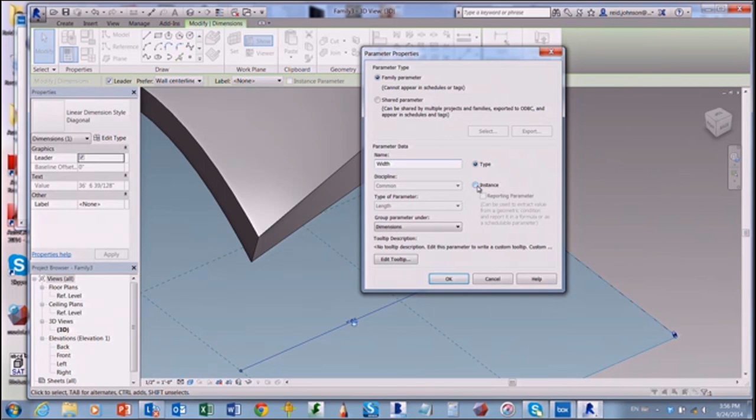So if I click on that dimension, just like I did in the generic family editor, I can come to the top under label and say add parameter, and give it a name. We'll call this one width, and we'll make it an instance parameter again as well. So instance parameter, and we'll say OK.

And now you can test it and troubleshoot and see if it's going to work. So I go back to my family types, the little, looks like 4 little blue squares in the upper left. And you'll see that your width has shown up now. And you can type this in and change the width within reason and say apply, and watch the thing grow or shrink.

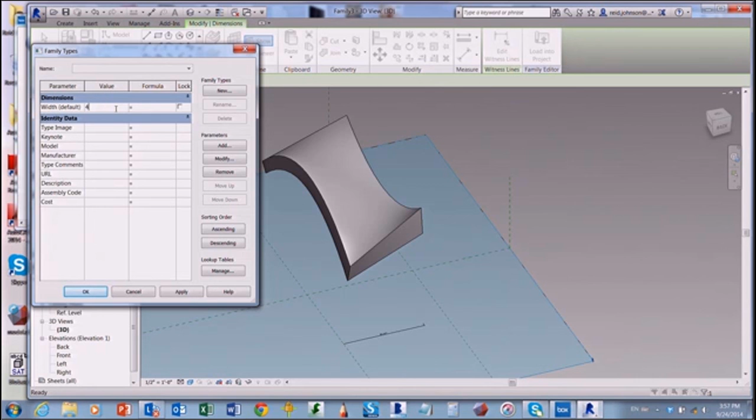Does that not work for anybody? Needs help? You guys got it? Cool. You guys are really good.

All right, so I've got this family. I've saved it. I haven't saved it. It's called Family 3. So give it a name. I'll say File, Save As, Family, and I'll call it, Crazy Roof or whatever this wants to be. So saving it gives it a name.

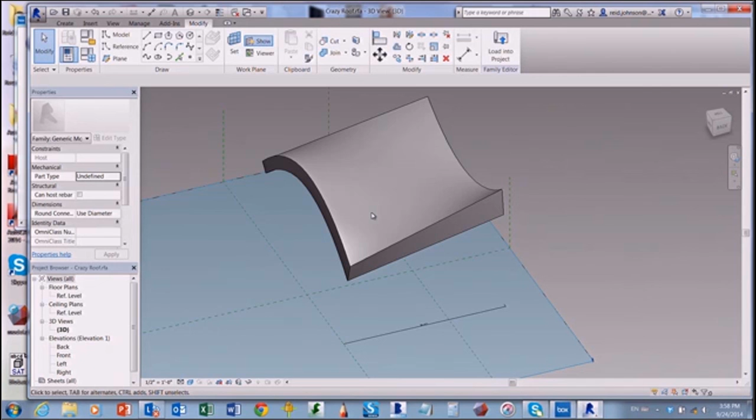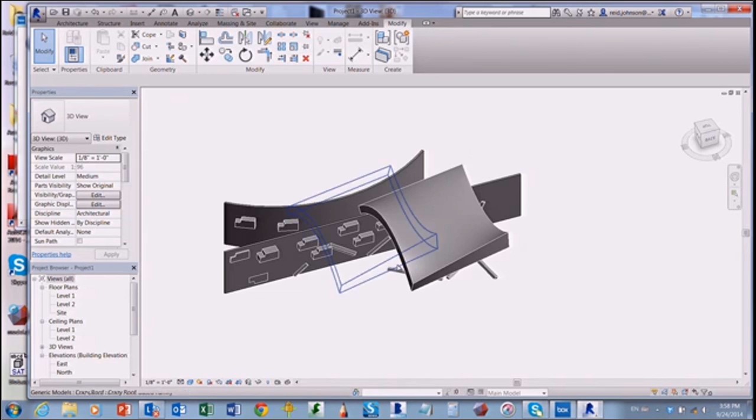Then I can load it into my project here, to my basic project 1. Now I can click to place this thing in a floor plan, but I'll need to go to my 3D view to see it. So there it is. And now in Revit I've got this family. I can select it and I can change its parameters. You can see here, now that I'm in the project, I can actually adjust the length of this roof and have it fit my project. I can move it around and put it where it needs to go.

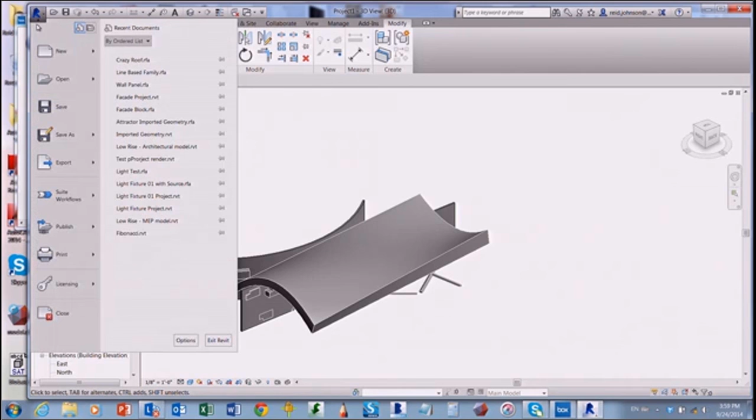We'll hit save there. Cool. And we'll just take a quick little break, and we'll come back. Is 5 minutes enough? Run to the bathroom and come back? All right, cool.

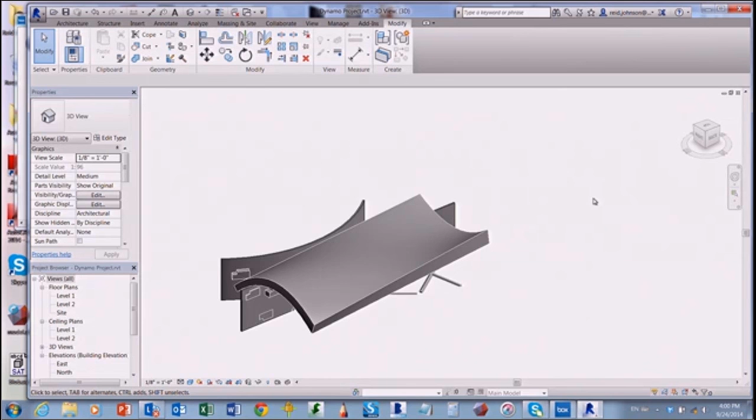If you don't have Dynamo already, it's a chance to quickly go to, you'll have to close Revit, but you go to dynamobim.org, and it's a big button that says install. You want to close Revit first before you do that. It's a pretty quick install. You can do it in 10 minutes on that one if you don't have it already.